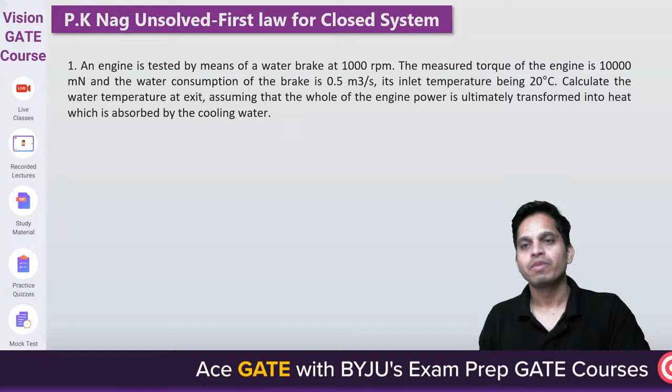Theek hai, chalo start karte hain with first question. First question, very first question kya kehta hai? An engine is tested by means of a water brake at 1000 RPM. No, buffering is not there, I can watch that. Just refresh your browser, chalo.

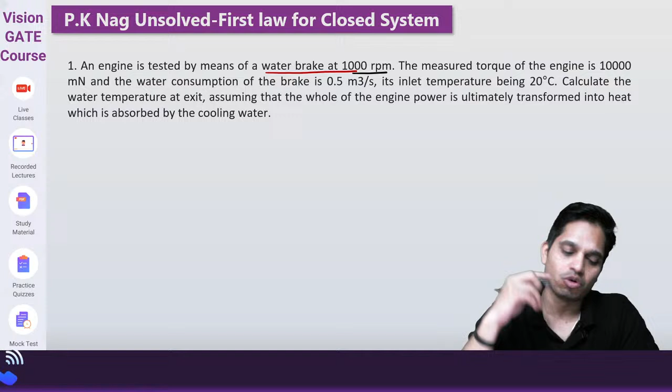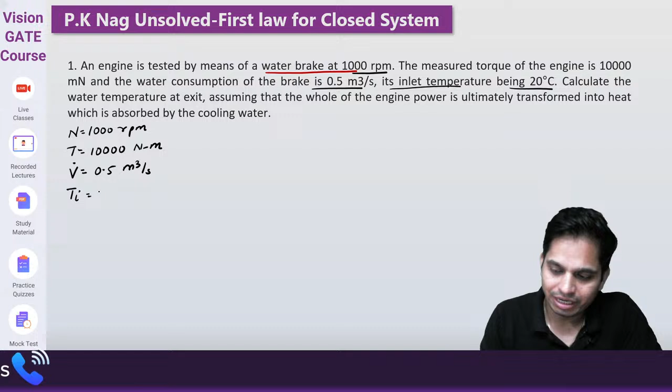So N is equal to 1000 RPM, and the measured torque is 10,000 Newton meter. The water consumption of the brake: volume flow rate is 0.5 meter cube per second, its inlet temperature being 20 degree. Calculate the water temperature at exit, assuming that the whole of the engine power is ultimately transformed into heat, which is absorbed by the cooling water. That means your engine is running and you want to stop the engine by giving a water supply. So when water stops it, energy will be generated and stored by the water, so water temperature is increasing from Ti to Te.

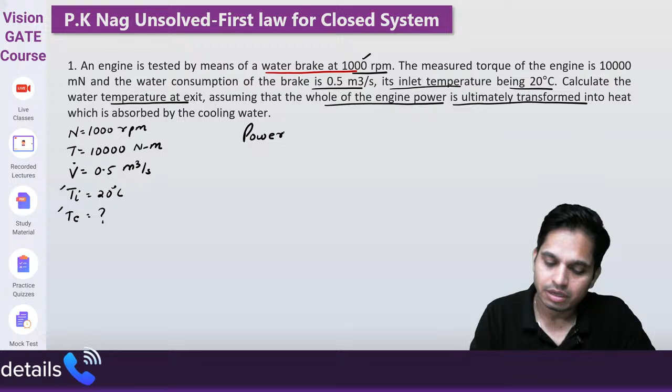So tell me, whatever power the engine is rotating at 1000 RPM with, what will be the power? Engine power released will be directly transformed into heat absorbed by water. So engine power equals heat absorbed by water. What is engine power? Torque into omega. What is heat absorbed? MCdT. Torque is 10,000, omega is 2 pi N by 60. Mass is density into volume flow rate, and specific heat is 4.18, into T exit minus Ti.

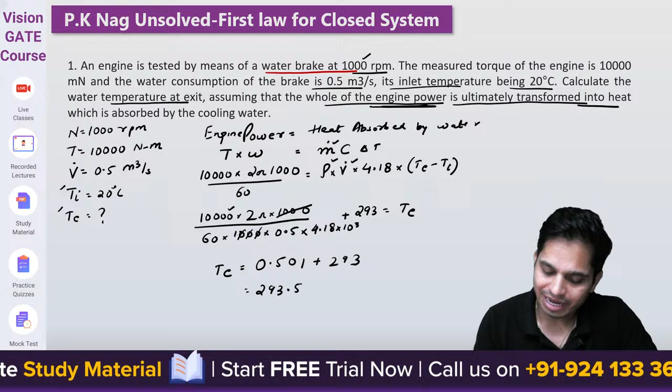This I need to take in joule, okay, because this I have taken in Newton, okay. So you'll get 0.501 plus 293. So it is 293.501 Kelvin.

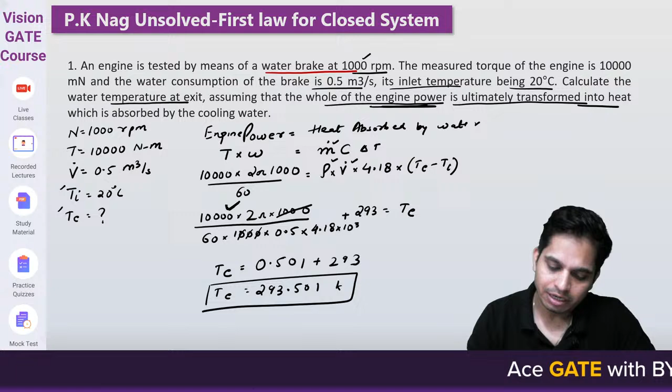This we have taken in Newton meter. So this I need to take in joule. Okay, understood? Chalo, next question.

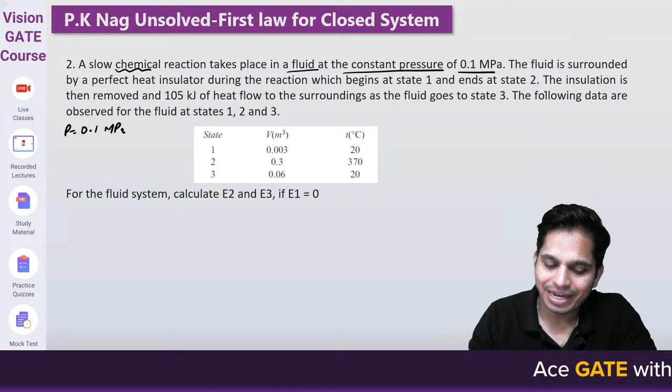A slow chemical reaction takes place in a fluid at constant pressure of 0.1 megapascal. That means pressure remains same, 0.1 megapascal. The fluid is surrounded by a perfect heat insulator, during which the reaction will begin at state 1 and ends at state 2. The insulation is then removed and 105 kilojoule of heat flow to the surrounding as the fluid goes to state 3.

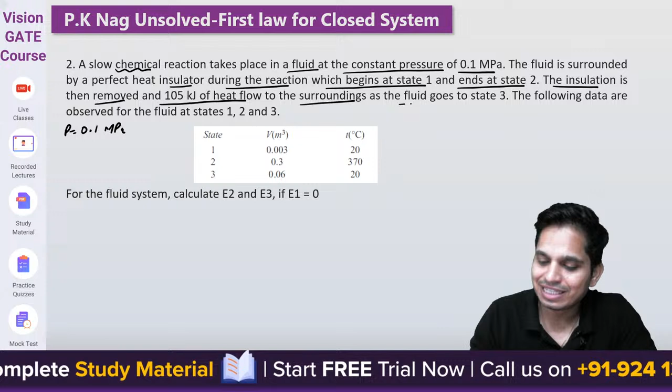So state 1 to 2 kya ho raha hai? No heat transfer, Q is equals to 0, insulated hai. But when you are going from 2 to 3, heat rejection is happening, yaani ki 105 kilojoule of heat is going out. The following data is observed from 1 to 3.

For the fluid system, calculate E2, E3 if E1 is 0. I have to find out E3 and E2. So I know one thing: first law of thermodynamics for a process. What is it? dq is equals to du, but it is here de plus dw.

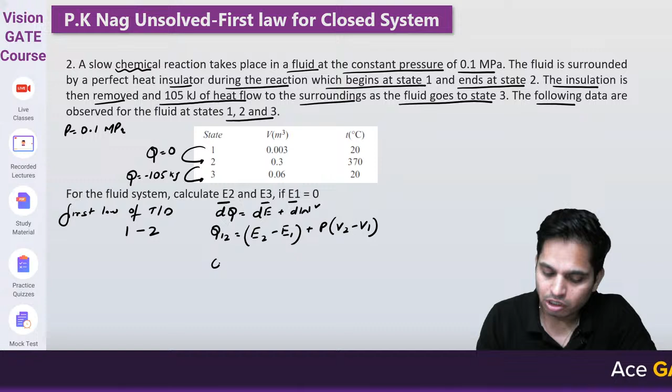Now, let us say Q1-2 is equals to E2 minus E1. And work is at constant pressure means what? P into V2 minus V1. When I am going from 1 to 2, then I am saying this, okay. So this is 0. E2 I need to find out.

E1 is 0, plus pressure is 0.1 into 10 to the power 5 into 0.3 minus 0.003. Tell me how much is E2? How much will be E2? Calculate E2 quickly.

Now once E2 is calculated, then you can do Q2-3 is equals to E3 minus E2 plus work, so P into V3 minus V2. Now this is minus 105. Heat is rejected. E3 I need to find out.

Tell me what is E2? Plus 0.1 into 10 to the power 5, 0.06 minus 0.3. Kitna aa raha hai E2?

E2 aayega -29.7. So when you put it, it will be plus 29.7. Now tell me how much is E3?

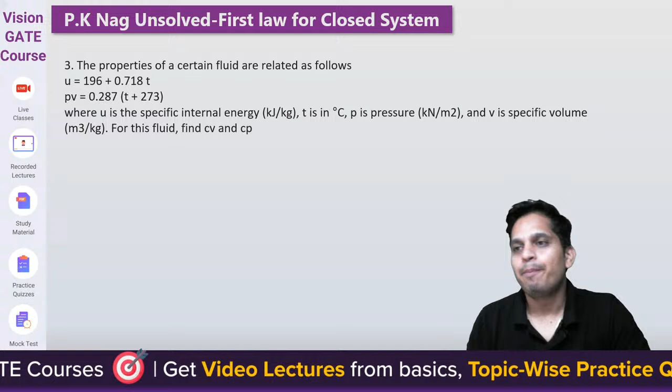U ye hai, PV ye hai, where U is specific internal energy and T is in degree Celsius, P is in pressure, V is in specific volume, meter cube per kg.

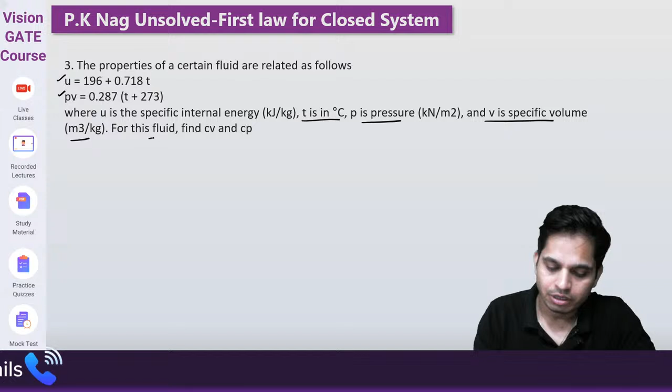CV and CP I need to find out, CP and CV. So first of all, CV is equals to... kya padha hai humne? CV kya hota hai?

du by dt at constant volume, yaani ki d by dt of 196 plus 0.718 t.

Okay, d by temperature. So what you are going to get here? 0 plus 0.718, and therefore it is 0.718 kilojoule per kg Kelvin.

Next is Cp. So Cp is what? Cp is d by dt of dH at constant pressure. So it equals to d by dt. H is what? U plus PV.

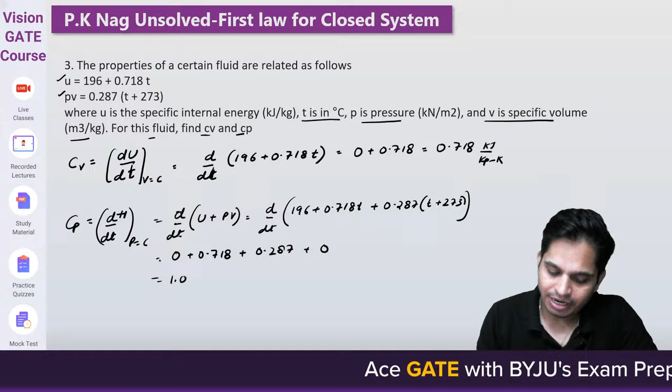So if I differentiate this, it will be 0 plus 0.718 plus 0.287 plus 0. So it is 1.005 kilojoule per kg Kelvin is Cp. This is what they are asking simply.

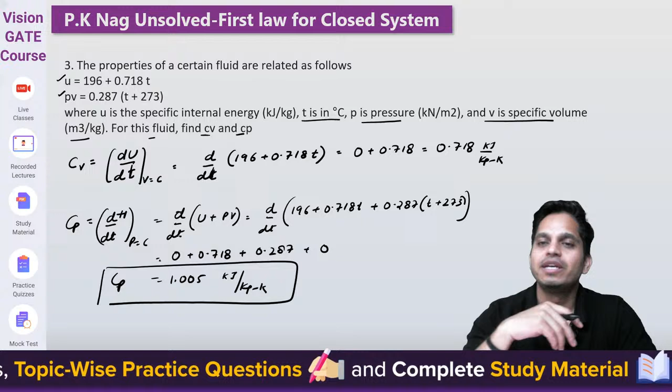Theek hai, now next.

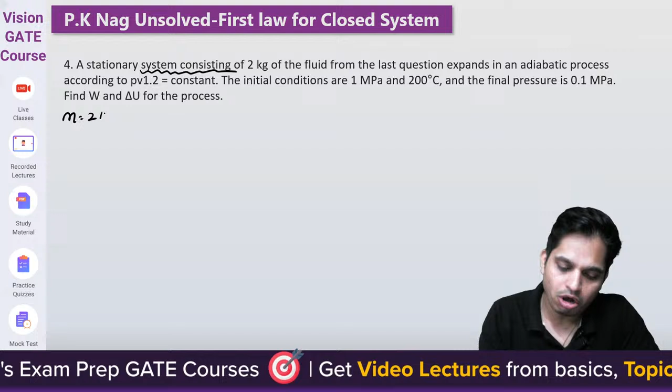A stationary system consisting of 2 kg of fluid from the last question, where Cp is 1.005 and Cv is 0.718 kilojoule per kg Kelvin, expands in an adiabatic process according to PV^1.2 equals constant. The initial conditions are P1 is 1 megapascal, T1 is 200 degrees Celsius, P2 is 0.1 megapascal. Find W and delta U.

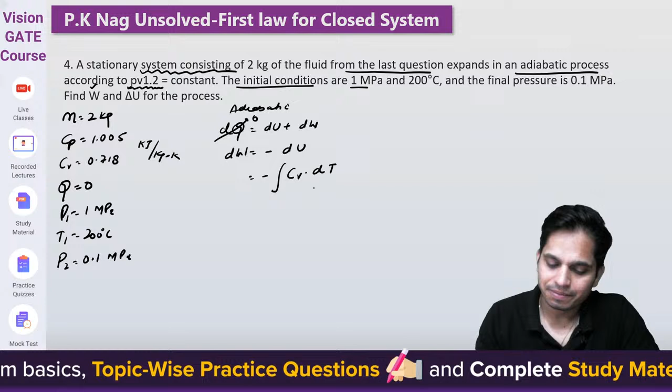So first thing, it is an adiabatic process. I know dq equals du plus dw. Since it is adiabatic, dq is zero, so dw equals minus du, which is minus Cv dt, i.e., minus m Cv dt.

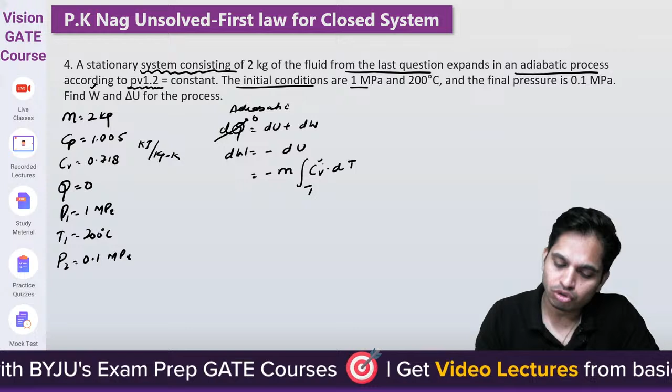The point is, Cv I have already taken, I need to change this from T1 to T2. Now what is T2? T2 is not given, but I know it is adiabatic, so can I say T2 by T1 equals P2 by P1 to the power (gamma minus 1 by gamma)?

So T2 equals T1 into (0.1 by 1) to the power... T1 is 200, better to always convert into Kelvin, so 473 into 0.1 by 1, with gamma equals 1.4.

How will you get gamma 1.4? Because you see the ratio, Cp by Cv, it is 1.4. So 0.4 by 1.4 — but wait, this exponent is actually given as 1.2, not 1.4.

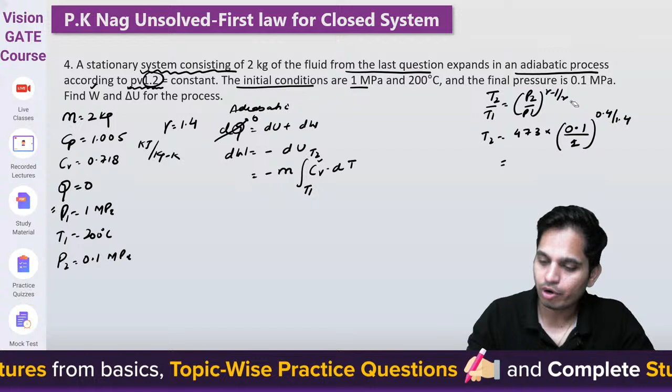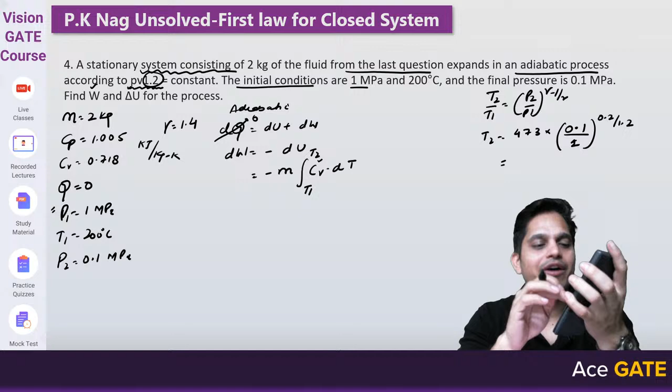So 0.2 by 1.2, how much will T2 come out to be? T2 equals 0.1 to the power (0.2 by 1.2) into 473, giving 322 Kelvin. So T1 is 473 Kelvin, T2 is 322 Kelvin.

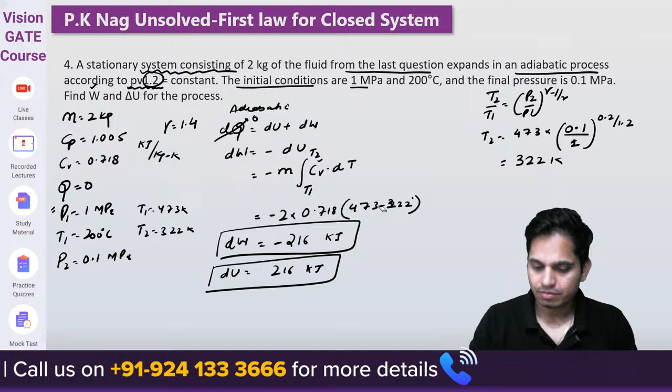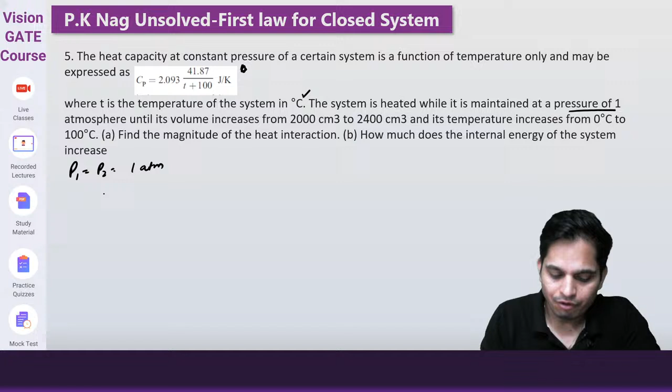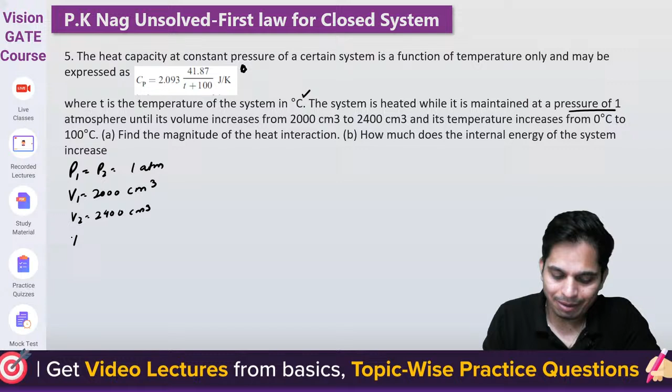Now, the heat capacity at constant pressure of a certain system is a function of temperature, Cp is given, where T is the temperature of the system in degrees Celsius. The system is heated while maintained at constant pressure of 1 atmosphere until its volume increases: V1 is 2000 centimeter cube, V2 is 2400 centimeter cube, and temperature goes from T1 273 Kelvin to T2 373 Kelvin. Find the magnitude of heat interaction and how much the internal energy of the system increases.

Chalo, constant pressure process hai. So heat transfer in constant pressure equals dH equals Cp dt, integrated from T1 to T2. Cp is given as 2.093, 41.87, T plus 100, integrated from T1 to T2 dt.

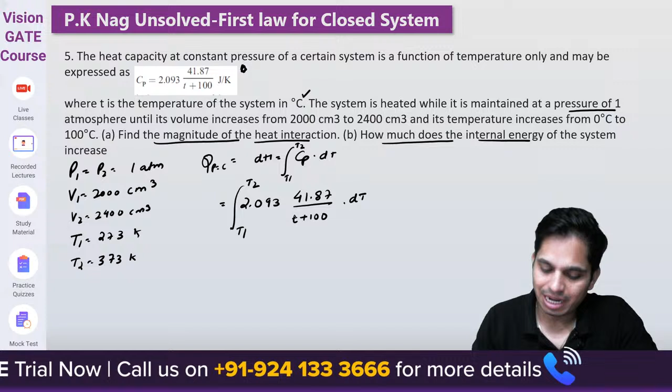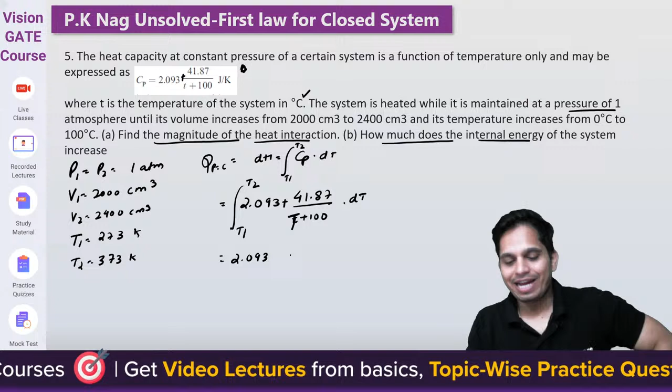This term is capital T basically — I think one plus is missing here, okay chalo. So 2.093, when I integrate it, I get T here plus 41.87 ln(T plus 100).

Divided by 1, because for T you have to divide by the derivative of (T plus 100). And from T1 to T2 you directly write T2 minus T1 plus 41.87 ln[(T2 plus 100)/(T1 plus 100)].

Quickly tell me, what is the heat transfer?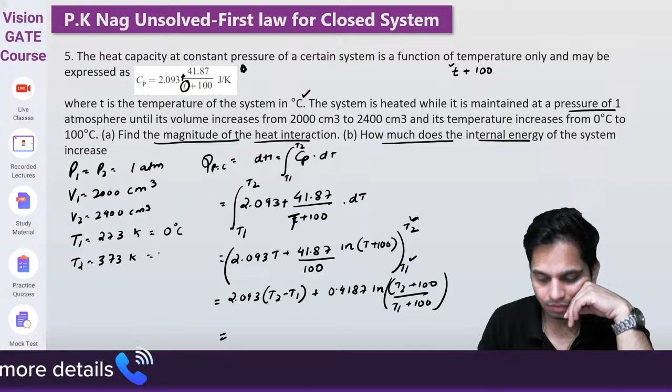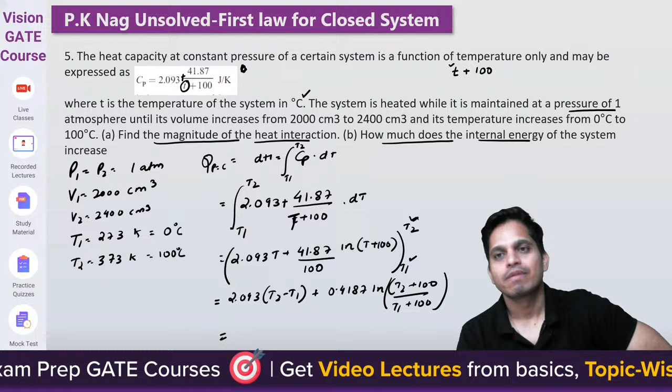So put this into degree Celsius simply: 0 and 100. You can do either of the things, or you can convert this temperature: plus 273 equals temperature in Kelvin. So this is degree Celsius, this is in Kelvin. So T equals T minus 273 — either way I can do this.

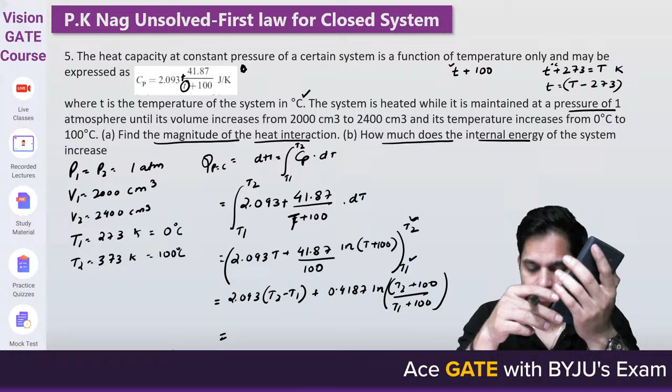Kitna aa raha hai answer? Calculate quickly. This is what, 100 minus 0, so this is 209.3 plus 0.4187 ln(T2 by...). T2 is what? T2 is 100. So it is 200 by 100. Quickly calculate, why are you not able to calculate this?

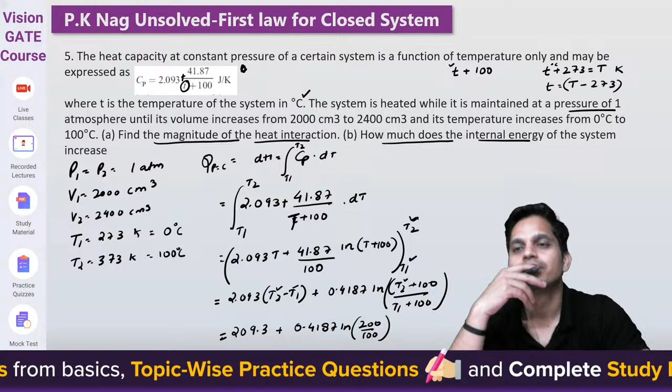Now internal energy change, I need to calculate internal energy change. So dq equals du plus dw, I need to find du equals dq minus dw. This is 209.58 minus dw, how much is dw? PdV — both things I know.

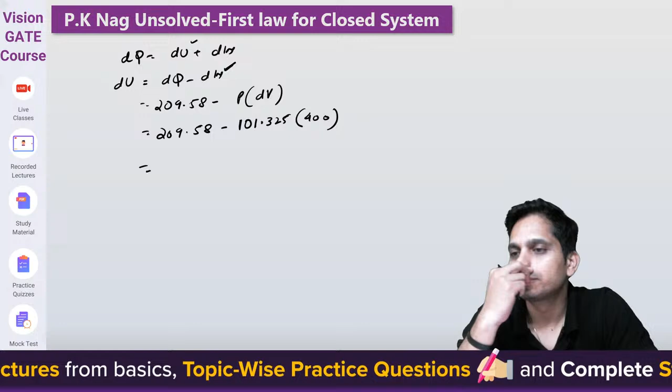Pressure given is 1 atmosphere, i.e., 101.325 kilopascal into (2400 minus 2000), i.e., 400. So you can calculate this — but mind it, it's given in centimeter cube, so you have to convert this into meter cube.

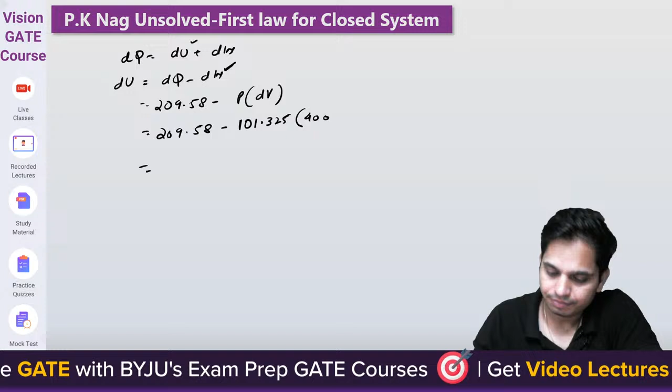Quickly tell me what is the answer. Somewhat I think so, yeah.

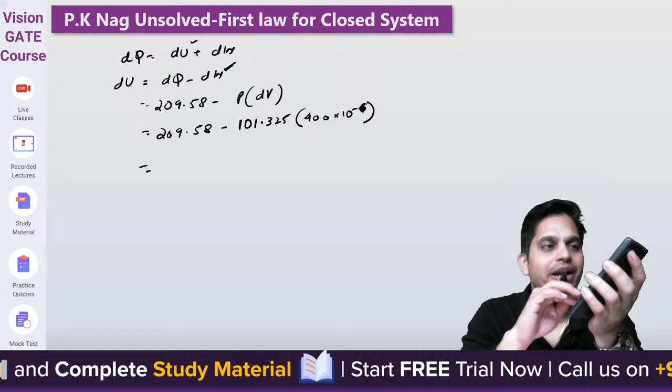ओके सेंटीमीटर क्यूब है ना ये, तो 6 आएगा यहाँ पे। इट इज सेंटीमीटर क्यूब नॉट स्क्वायर। ओके तो ये आएगा 400 इंटू 10 टू दा पावर -6 इंटू 101.325, 209.58, माइनस आंसर।

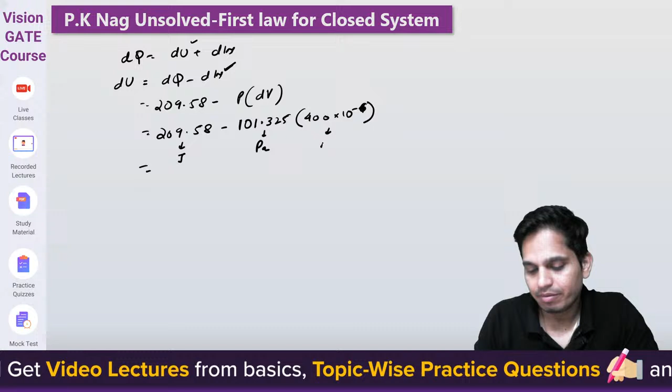कितना आया ये? This kilojoule, this is joule, sorry joule. And this will also be, now this is joule, so this should also be in kilopascal. It is in pascal, it is in meter cube. Okay, so this will be 209.58 minus 101.325 into 10 to the power 3 into 0.

Now you will get something, whatever you will get in joules. Whatever you are going to get, you will get in joules. 101.325 into 10 to the power 3 into 400 into 10 to the power -6. 209.58 minus this is कितना आ गया? 169.05 joules du, ठीक है।

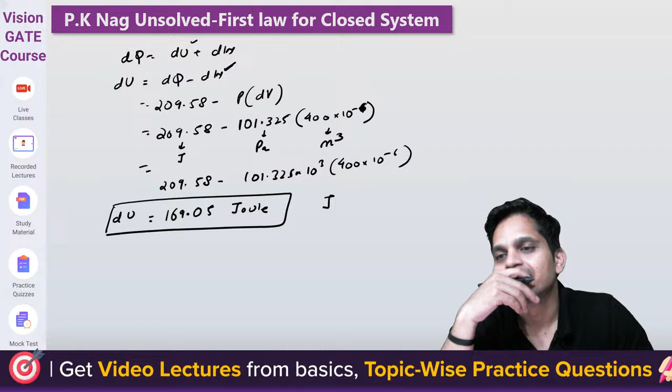माइनस करो भैया, माइनस करो। प्लस कर रहे हो क्या? 197 क्यों आएगा? चलो नेक्स्ट।

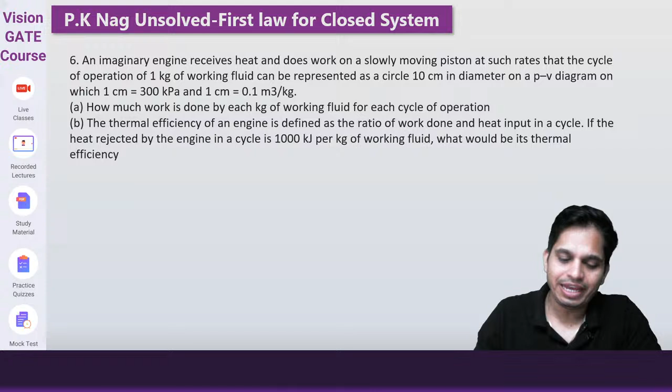An imaginary engine receives heat and does work on a slowly moving piston such that the cycle of operation of 1 kg of working fluid can be represented as a circle of 10 centimeter in dia on PV diagram.

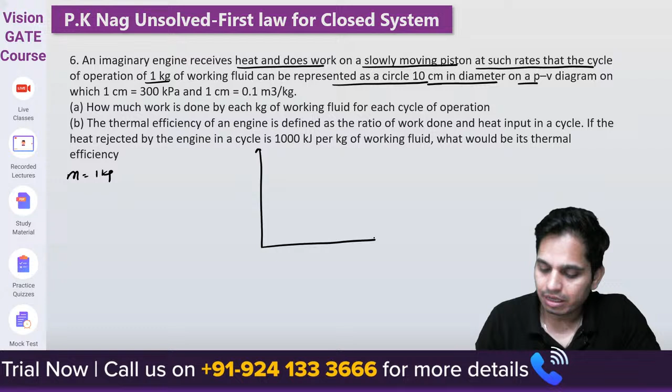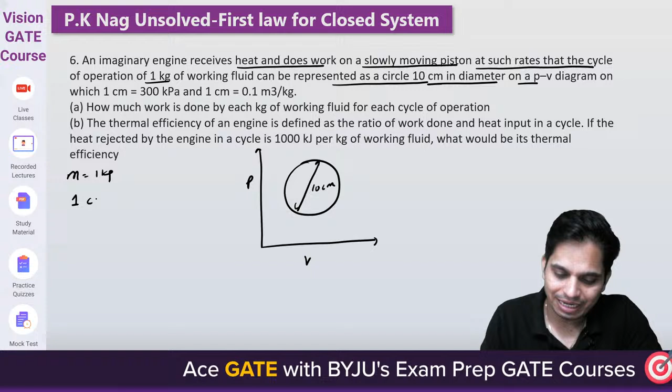That means my cycle can be shown on PV diagram as a circle with a dia of 10 centimeter and where 1 centimeter is equals to 300 kilopascal, or you can say 0.1 meter cube per kg. I need to find out work done by each kg, यानी कि 1 kg of working fluid for each cycle of operation. Then thermal efficiency of the engine is defined as the ratio of work done and heat input in a cycle. If heat rejected by the engine is 1000 kilojoule per kg of working fluid, what will be its thermal efficiency? Very simple question, very simple question.

Okay चलो पहले तो I need to understand this कि if I need to find out work, then work is given by area enclosed by the cycle on PV diagram. So area of circle क्या होगा? एरिया ऑफ सर्कल क्या होगा? आपको डायमीटर पता है π/4d², है ना? तो π/4d², ये क्या दे रहा है मुझे? एरिया।

π/4d², लेकिन ये है किसमें? इट इज इन सेंटीमीटर स्क्वायर, ठीक है? 10 सेंटीमीटर, तो 10 स्क्वायर इंटू π/4, 78.

But I want work, it is work doesn't have a unit of centimeter square. So I need work. How will I be able to convert this into work? So work is equals to this area. It is in centimeter square into 300 kilopascal per centimeter into 0.1 meter cube per.

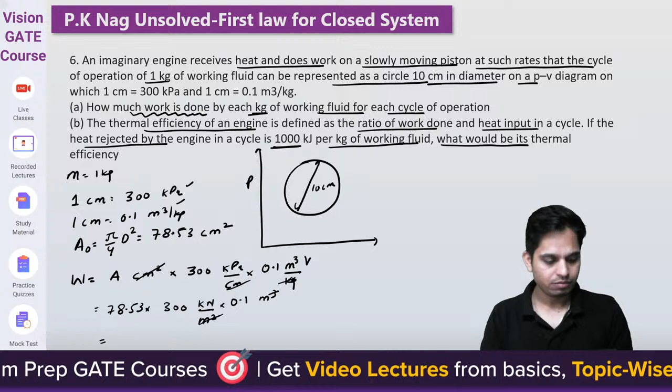टू थ्री फाइव सिक्स किलो जूल। आ रहा है इतना? इज इट कमिंग? Yes.

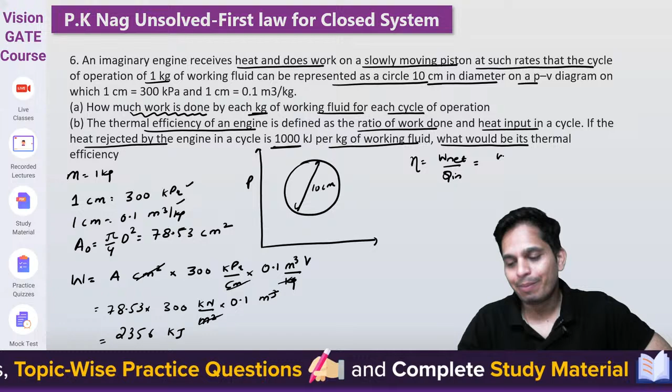Then they are asking thermal efficiency. So what is thermal efficiency? Is equals to net work by heat input. Now heat input is not given, but can I write Q in?

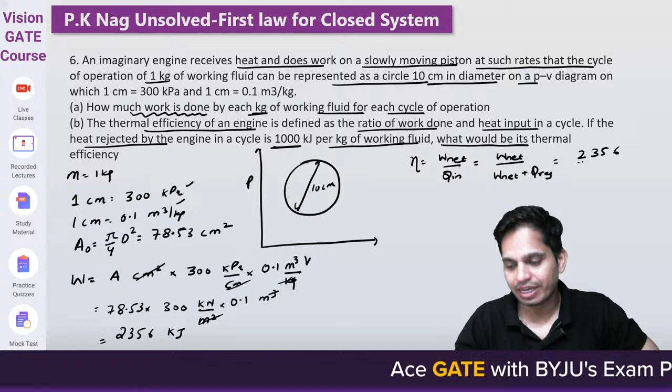Whatever heat you are supplying, it will be converted to either work or rejected. So I can supply Q in equals W net plus Q rejected. I know everything. 2356 upon 2356 plus 1000. So you can find out thermal efficiency.

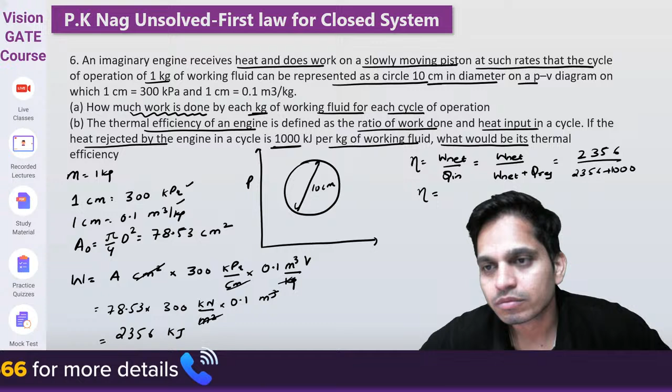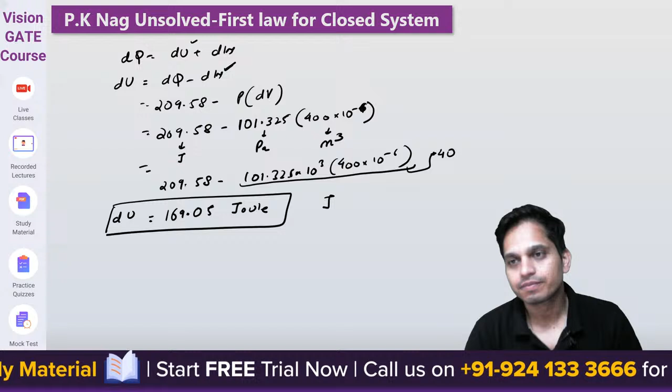ये 197 कैसे आ रहा है भैया, ये बताओ तुम। ये आएगा 40, आर यू एबल टू कैलकुलेट दिस एज 40 और नॉट? टेल मी फर्स्ट ऑफ ऑल। आई हैव कैलकुलेटेड इट जस्ट नाउ। समथिंग अराउंड 40 यू आर गेटिंग। And if you get this for T, you minus 40 from 209, so you will get this.

101.325 into 10 to the power 3 into 400 into 10 to the power minus 6, 40.53 exactly. Okay, so just recheck it, maybe recheck this later.

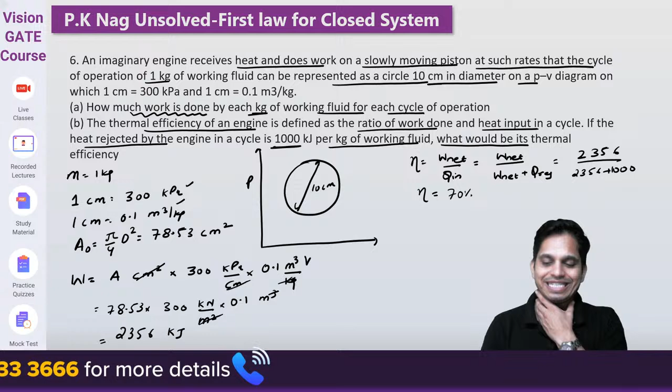Okay chalo, this is your last question, and then I mean second last question, and the last question you will get for homework.

Okay चलो ये बात देखते हैं। A gas undergoes a thermodynamic cycle consisting of three processes beginning at the initial state where P1 is equals to 1 bar, V1 is equals to 1.5 meter cube, and U1 is equals to 512 kilojoule.

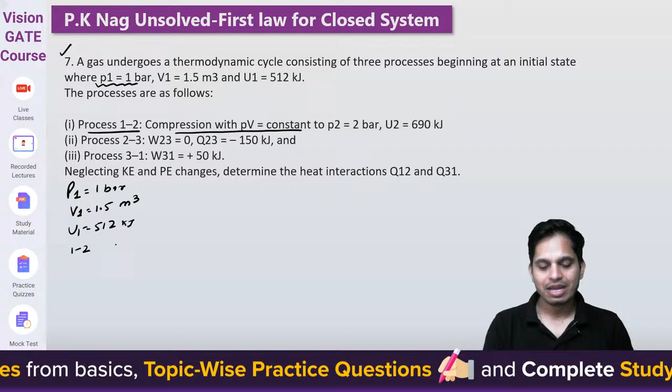Okay, I think there is some issue with this equation. It should not be PV is equals to constant, otherwise U should not change. Okay, so maybe there is some issue with the equation that I have taken from the book.

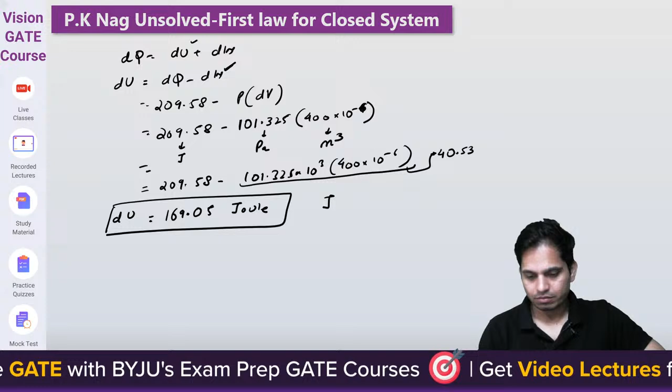Okay, here. So if you have taken temperature in Kelvin, then I will need to check. There is maybe some issue with the equation then. Okay, I will recheck it.

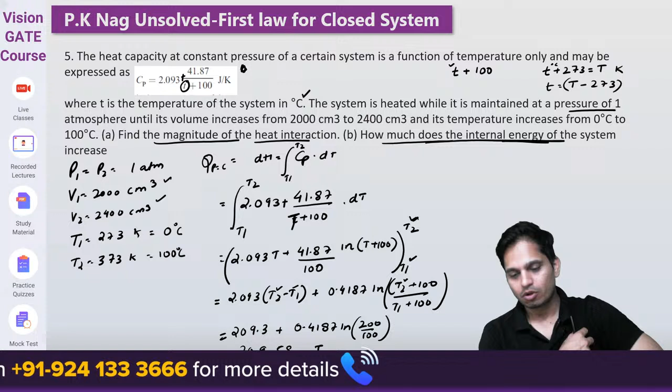I will share the solution in the Telegram group. Okay, some issue then with the equation could be. Okay, let's finish the last question first of all.

Now, it cannot be PV equals constant because I have taken it from PK Nag. There could be some issue because if... yes, could be, I'll check that. Okay, no issues. Now...

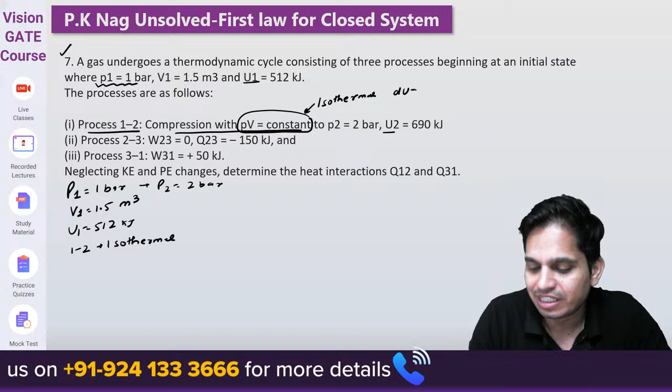Look, it cannot be PV equals constant, because PV equals constant means isothermal. And if it is isothermal, then dU must be 0. So U1 cannot be equal to U2. So there is some mistake maybe here.

Okay, but anyway, here U2 equals 690 kilojoule. Okay. And I need to find out Q12 and Q31.

So if I talk about the 1 to 2 process, can I say dQ1-2 equals dU1-2 plus dW1-2? Okay, let's go.

Now I need to find out dQ1-2, and dU will be U2 minus U1 plus...

Now there is a question here. Should I take it isothermal? Should I take it polytropic? If I take polytropic, I need to know n. Okay, so either something is missing here.

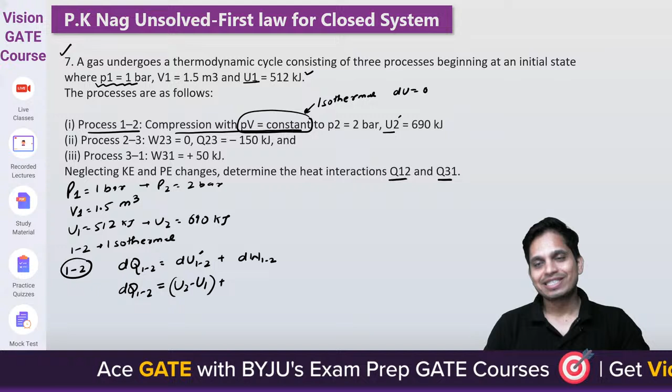What is this 150? Heat transfer. Wait, okay. So I don't know if I should take isothermal or polytropic. If I need polytropic, I need n. So for one instant, because we need to know the concept, that's all.

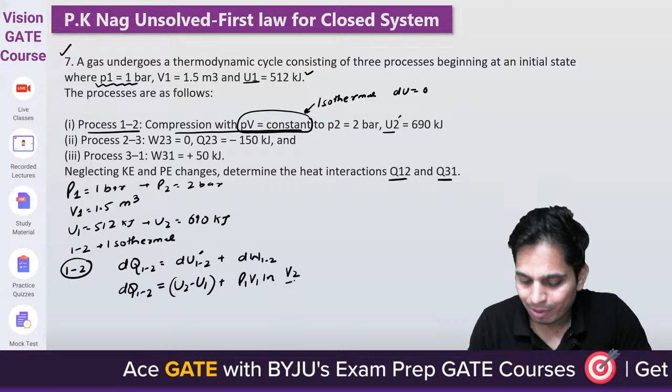For one instant, let us assume it is isothermal, okay? So if it is isothermal, then I can take P1 V1 ln(V2/V1), or I can also write, because V2 is not known, P1 by P2.

And you know everything: 690 minus 512 plus P1. P1 is 10 to the power 5, square into V1 is 1.5, and this is 2.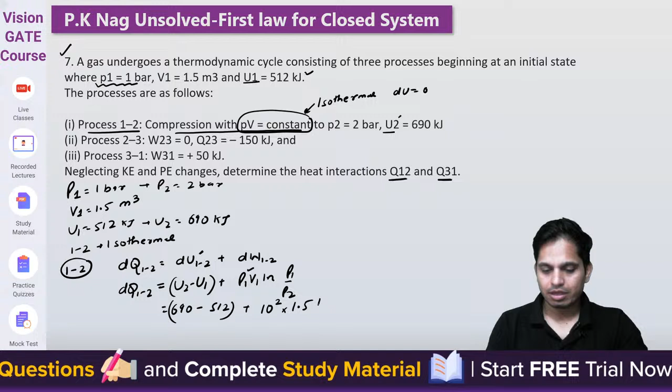One by 2, so you can find out Q1-2. How much is it coming? 74. Yes, 74 is coming, absolutely correct.

Now Q1-2, I got Q1-2. Now I need to find out Q3-1. So Q3-1 equals U3 minus U1 plus W3-1.

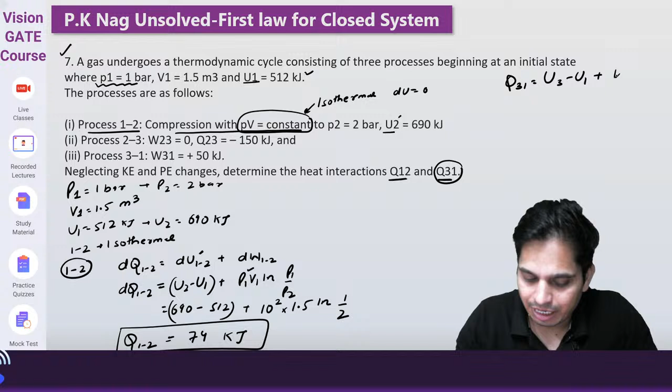Now U3 is not known to me. U1 is known to me, which is 512, plus W3-1 is 50. So the only thing I need is U3. How can I find out U3?

From process 2 to 3. Again, Q2-3 equals U3 minus U2. Okay, it is 3 to 1, right? It is 3 to 1. So I should write...

If I am going from 3 to 1, so 1 minus 3: this is 512 minus U3. Okay, chalo. U3 minus U2 plus W2-3. Now W2-3 is given as 0. Q2-3 is minus 150, equals U3.

U3 I have to find out. U2 is given to me as 690. So you can find out U3 equals minus 150 plus 690. How much will U3 be? 540. Yes, it is 540.

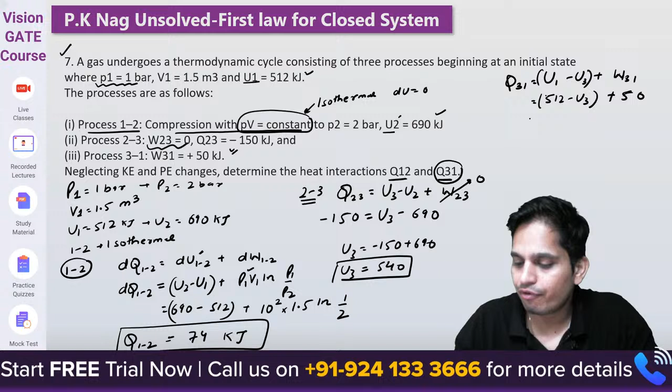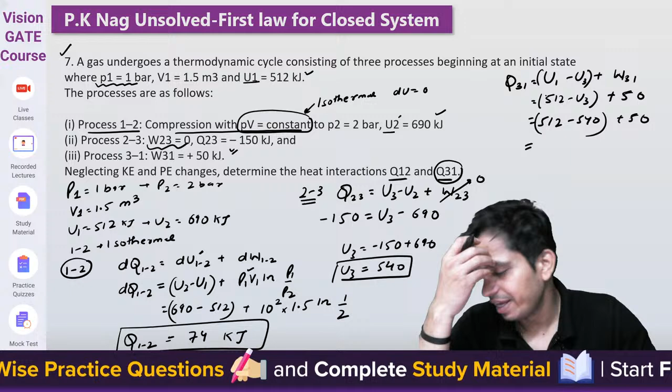So write 540 here, plus 50. How much is Q31 coming? 512 minus 540...